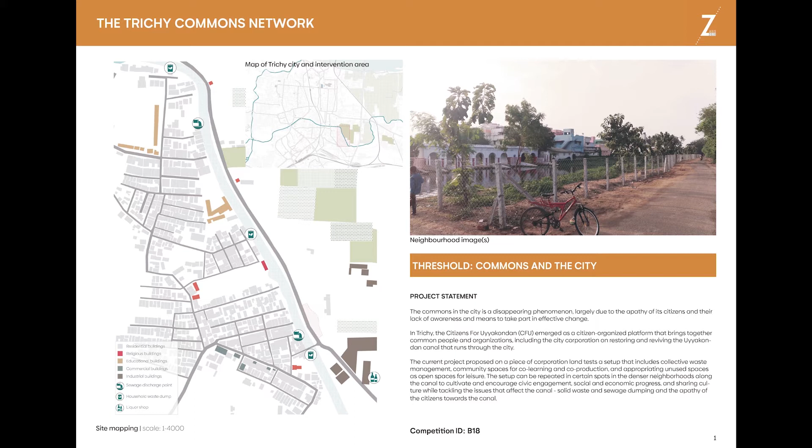Located next to the waste management complex is a community meeting hall with a diverse educational and cultural program, including a library with internet access. A third element is a public open space incorporating a child's playground and a youth area.

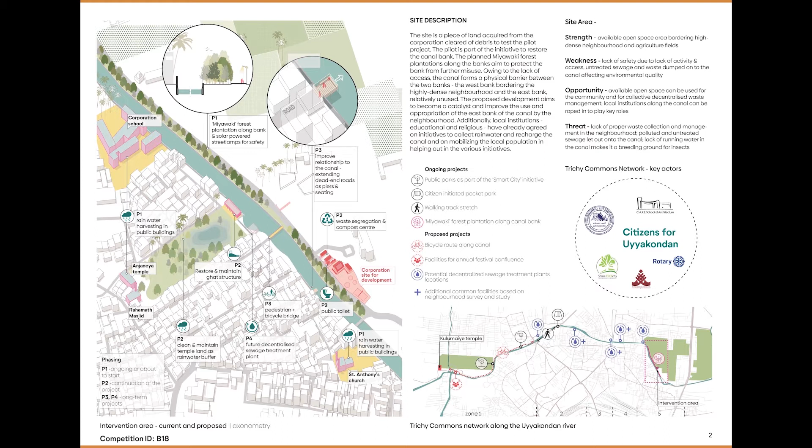Other fine-scaled urban elements include a pedestrian and cycling bridge linking both sides of the canal and a series of small platforms at the end of the neighborhood streets overlooking the canal for informal gatherings.

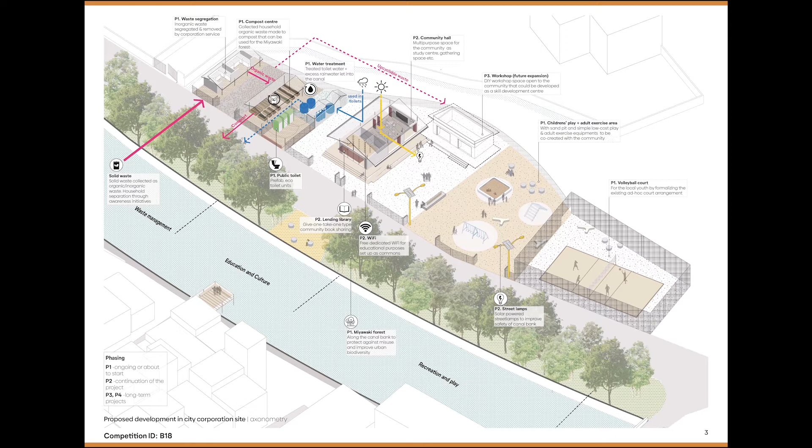During our jury deliberations, my colleagues and I had an active discussion about the meaning and symbolism of the light metal fencing indicated in the project's three-dimensional drawings. Securing the space was seen as necessary, but surely for this place to be a community resource for everyone, its borders needed to be broken down. We wondered if a more subtle solution could be thought of.

One way to think of this concern could be to rearrange the combination of elements. If the children's play space and volleyball court were reconfigured into a courtyard, a kind of outdoor room, they could be bounded by the waste management building and the meeting hall. A compound would then be created where the public space would be embraced by the buildings rather than merely being fenced.

I noticed in the comprehensive video and a photograph of the existing conditions on the first sheet of the submission, a religious building located on the neighborhood side of the canal bank. This archaic building has a monolithic resonance that I feel the present architectural language of the scheme could be inspired by in a contemporary way. This small but monumental simple structure has a civic presence that the wastewater plant and meeting hall deserve.

Notwithstanding, this project has an expansiveness about it that is both based in gritty realism and a forward-looking spirit. Its authors paid special attention to its context. It is a critique against the routine master planning attitude. Instead, it is based on an approach that works at the intersection of urbanism and environmental responsibility through citizen activism.

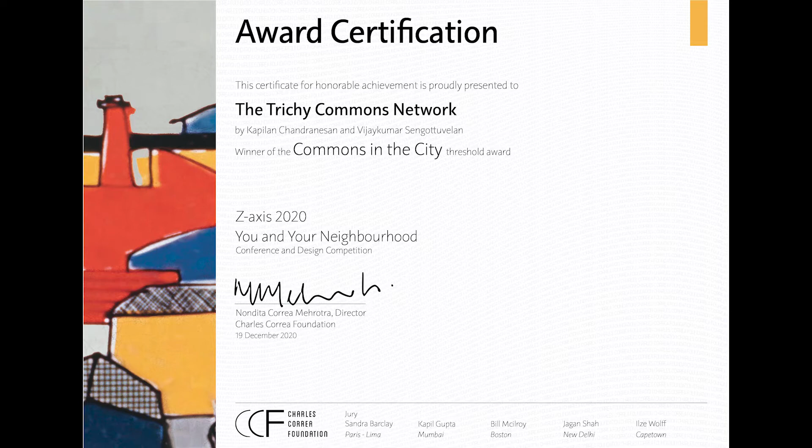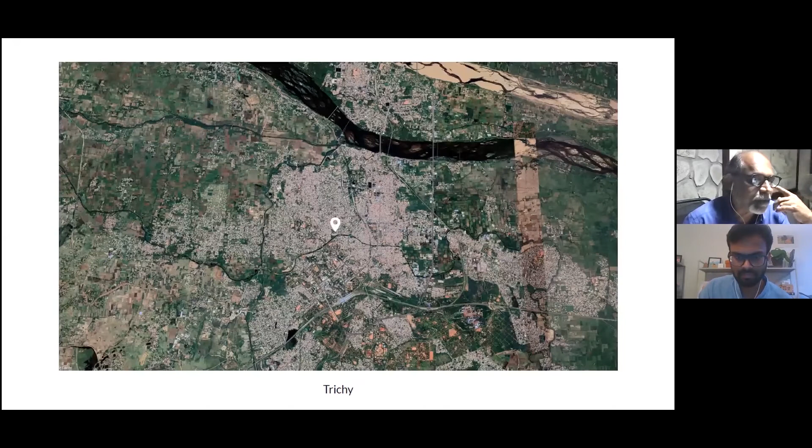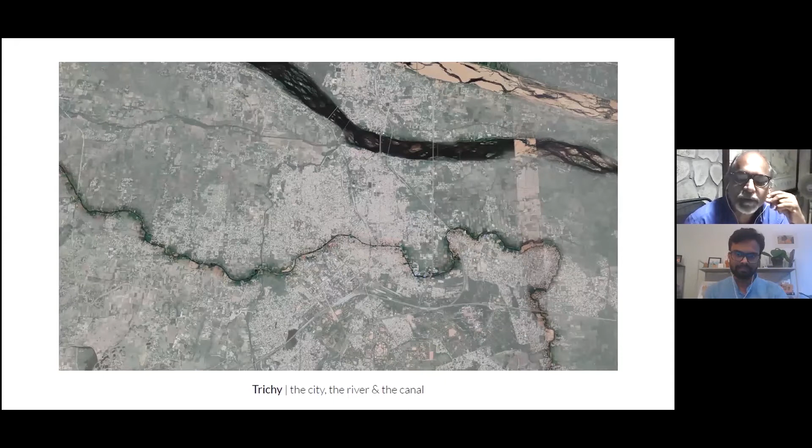So this project actually started as an urban design project in the C.A.R.E. School of Architecture under Professor Ramalingam, Godwin, and Ranjita. The students worked on this project, and then to take it further, we also had a few workshops, and one of the workshops was conducted by Professor PBK Rameshwar.

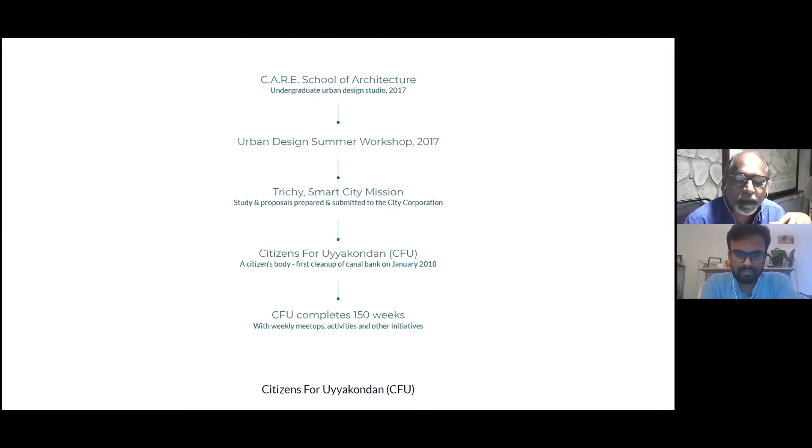And so then we thought that it should be taken forward, and we tried to form the Citizens Forum for this canal, which is a 1,000-year-old canal called the Uyyakondan Canal in Trichy. So we tried to form the Citizens Forum, which we called Citizens for Uyyakondan.

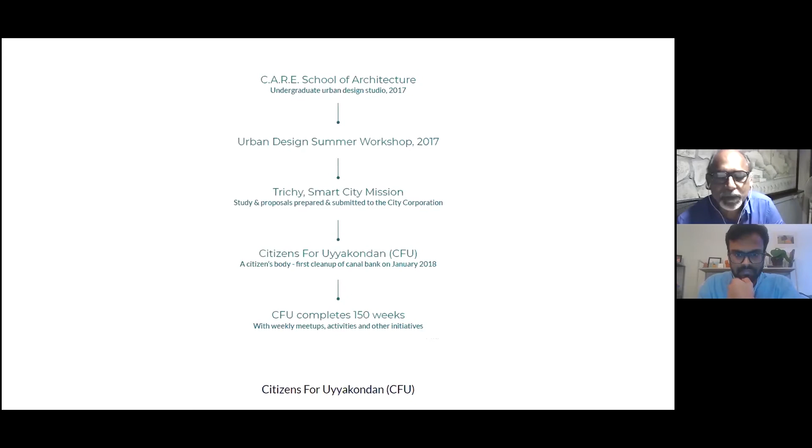Because it happens to be in the middle of the place, what we said was anybody can join, the criteria is that you should be using water. So it made people get excited, and we had lots of people. We had people from all walks of life coming in, professionals, students, and others also.

And then we tried to rope in the corporates and others also. So we had the C.A.R.E. School of Architecture and Bishop Heber College as the institutional partners. And then we had an executive arm, which is the Bridge Foundation. And we had the professional connect with the Indian Institute of Architects, Trichy Center. And then we worked with the Rotary Club of Trichy and the Inner Wheel Club. And we collaborated with the Trichy City Corporation and the PWD River Conservation Division also.

And as far as the corporates were concerned, we are in touch with HPCL, which has sponsored our work. And we are also in touch with ONGC. And so this is how it started. We started on January 7th, when Citizens for Uyyakondan launched the cleanup drive along the banks of the canal. And now we have completed about 150 weeks.

So we have tried to engage with the public throughout this, and post-COVID, or during this hopefully the last session of COVID, what we tried was to focus on one area which is at the fag end where the canal leaves the city. That is a very polluted area.

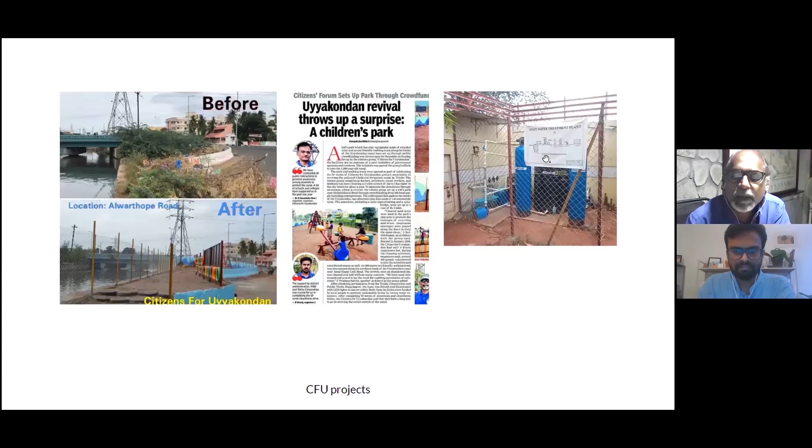So here we are working with the corporation, the people of that area, and our people from the Citizens for Uyyakondan. We are trying to get some activity there where we would like to involve the public. For this, one of the things was we tried to rope in a church, temple, and mosque situated at Durisamipuram, where we thought we will ask them to do rainwater harvesting and let the filtered water into the canal. So this is what we have been doing right now.

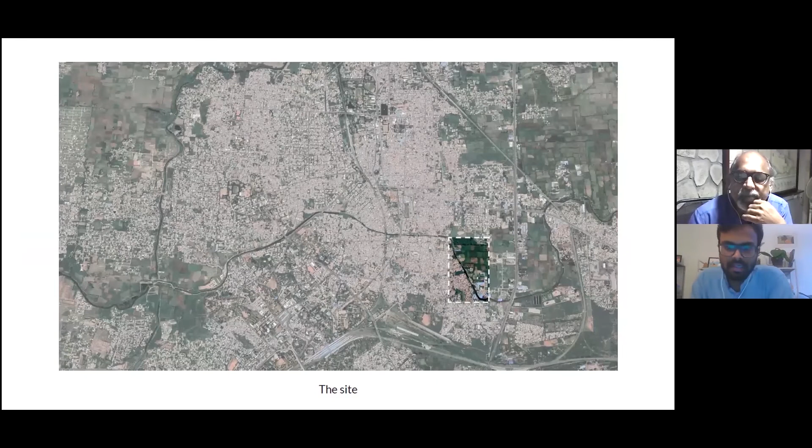So for this proposal, we take this part of the city, one of the places where the canal and the city limits join. As you can see, it's a very dense neighborhood in the city, and the canal forms a dividing line between the city and the agricultural land around it.

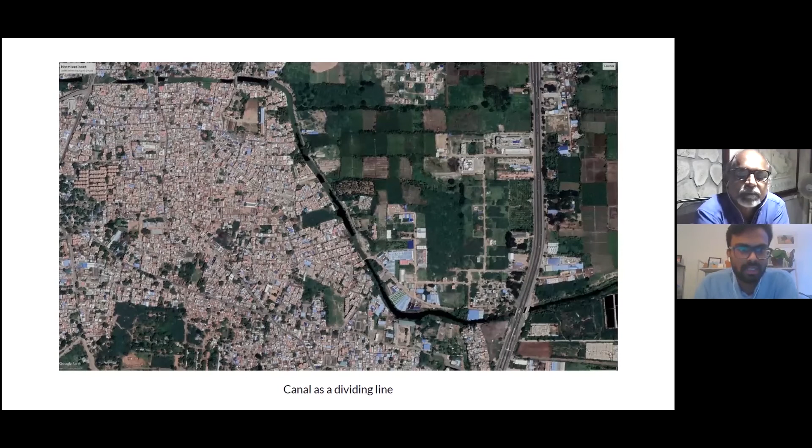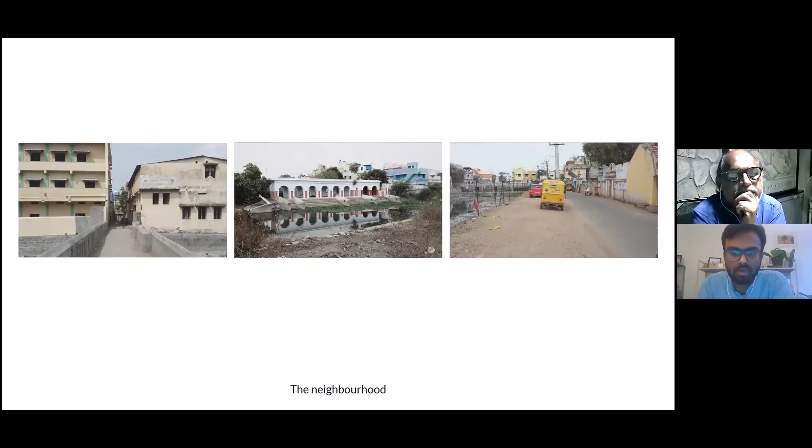It's also a relatively poor neighborhood with lack of good quality open space. So some images from the neighborhood, and the issues the neighborhood faces are similar to the issues the canal faces throughout the city, which is dumping of sewage and solid waste, poor maintenance of the bank, and lack of any quality open spaces. So the canal is viewed as a disadvantage.

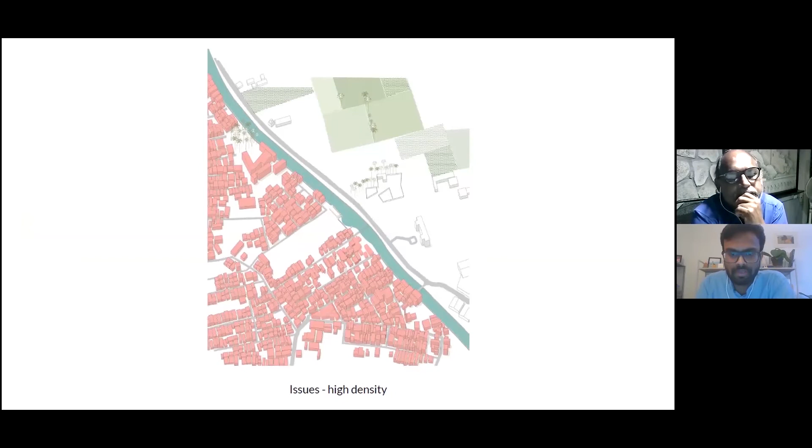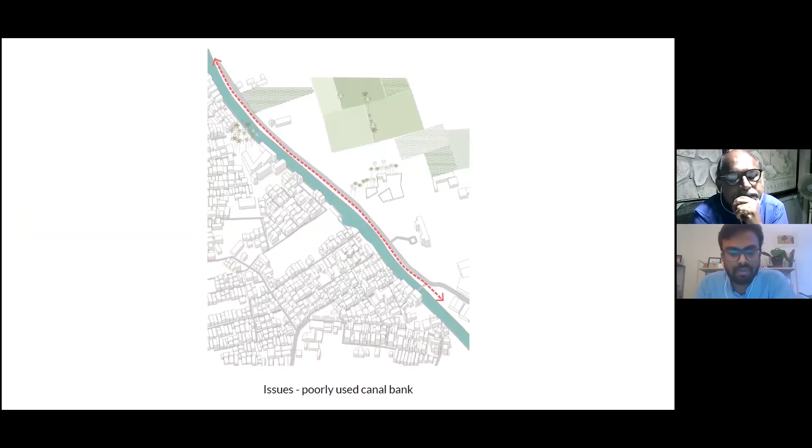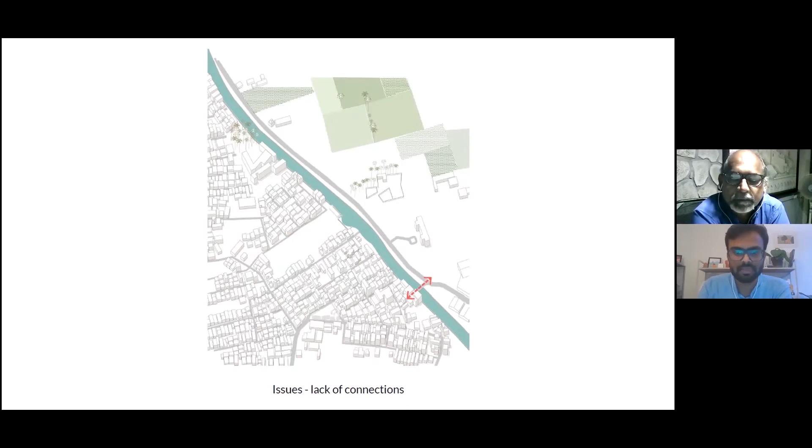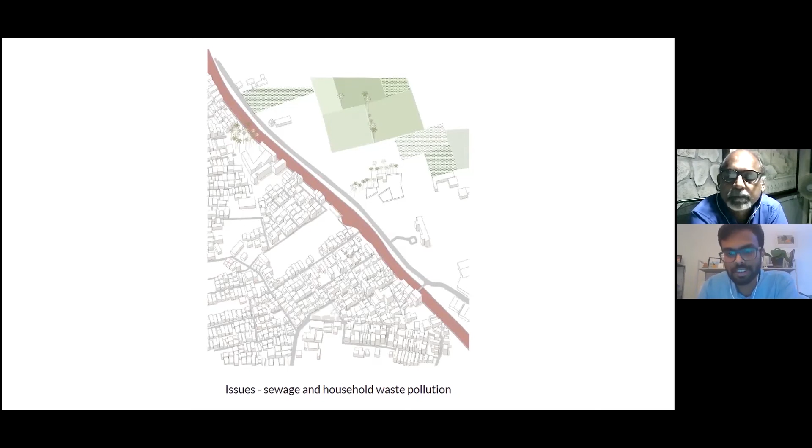This is an overview of the neighborhood. It's a dense neighborhood with no open spaces, also relatively poor households. The northeast bank of the canal is unused, and there is a lack of perception of safety there. It's unused also because of the lack of connections. For a stretch of 1.5 kilometers, there is one small pedestrian bridge, which effectively leads to neglecting the canal, which has now become a place for dumping sewage waste and household solid waste, without any relationship to the neighborhood.

So we looked at ways, one at the neighborhood level scale, and the other at a specific site level scale. At the neighborhood level scale, one of the first initiatives already underway is to clean up the northeast canal bank and establish a Miyawaki-style forest plantation to also protect the canal bank from future misuse.

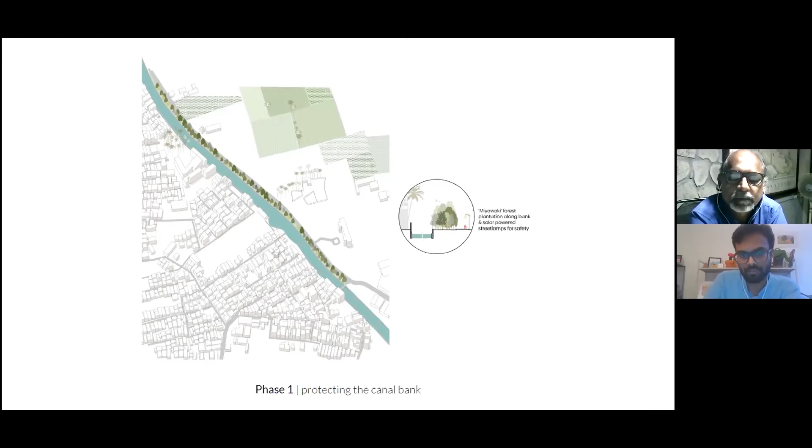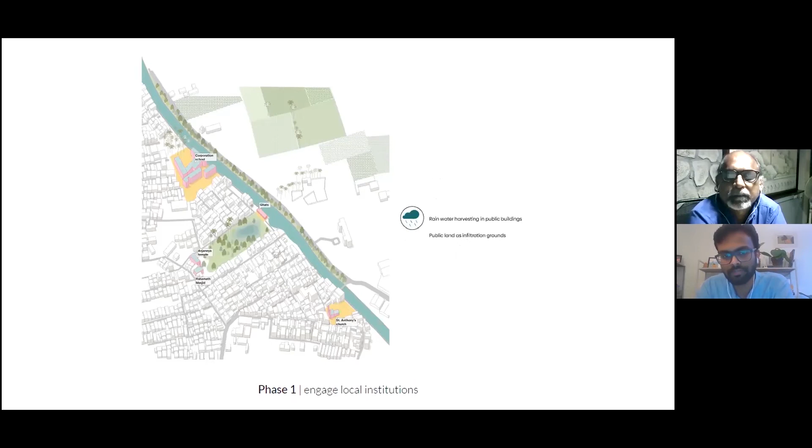The other, like it was mentioned, we rope in the local institutions - the church, the temple, the mosque, and the school - to engage with rainwater harvesting, but also engage them to raise awareness within the community. The third is CFU has agreed with the municipality to develop an unused plot as a community center with local waste management.

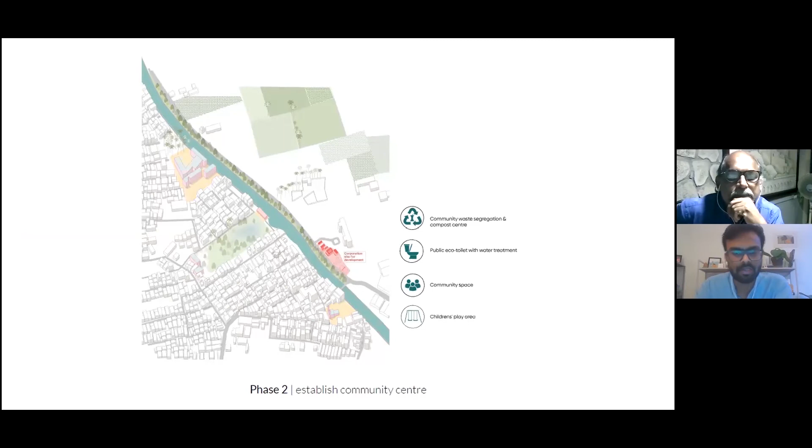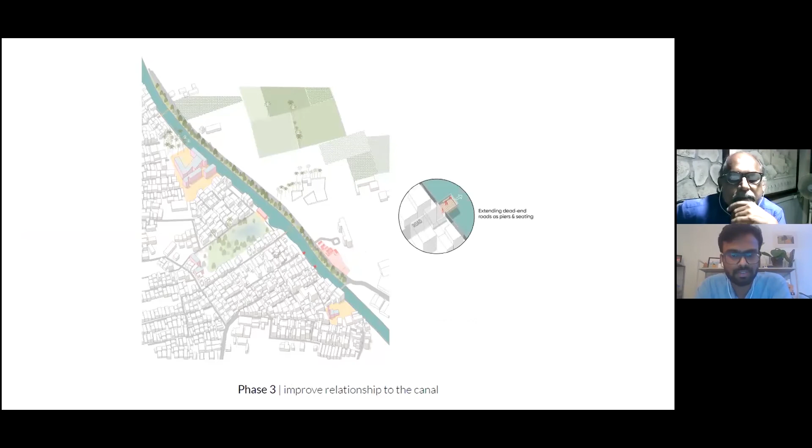And the fourth, longer term prospect, is to improve connection through pedestrian and bicycle bridges, extend dead-end roads into small platforms to increase the relationship of the people with the canal, and then to develop a decentralized sewage plant to treat the sewage water from the neighborhood.

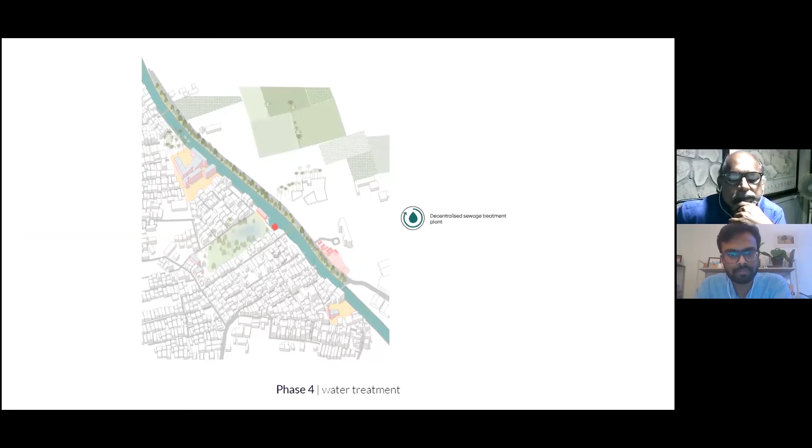At the community center, it's a bit more focused. This is the land acquired from the municipality to develop as a community center, which has been cleared of debris. We follow three main pillars: one is to have localized waste management and waste segregation, then to develop a community space, and the third is to develop an open leisure area for the neighborhood.

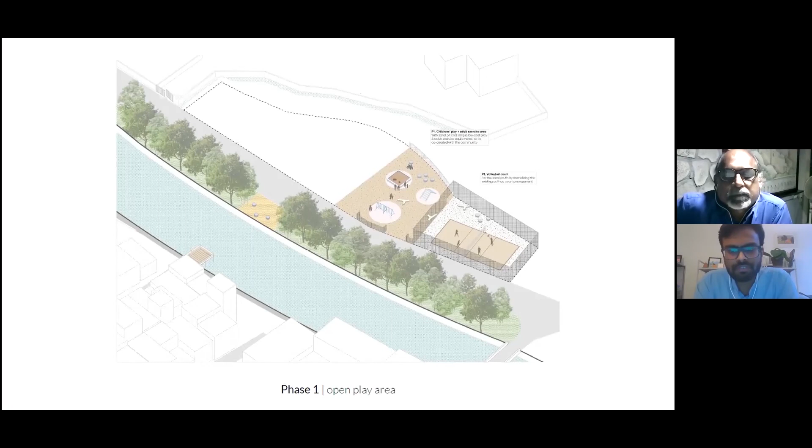The phasing of development is to establish the low-cost, easy initiatives first. Right now the local youth use this open space for an ad hoc volleyball court. We would formalize it to establish this place as more of a community space, and then to have a small low-cost public children's play area.

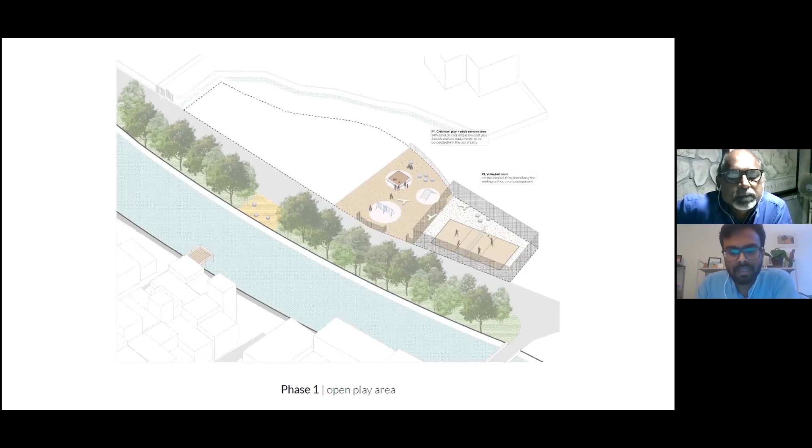The next step of development is to have a collective waste collection center and waste segregation, where the organic waste could be composted on site and used for the Miyawaki forest that's been developed. And then to have a few public eco-toilet units with a small water treatment plant to be let into the canal.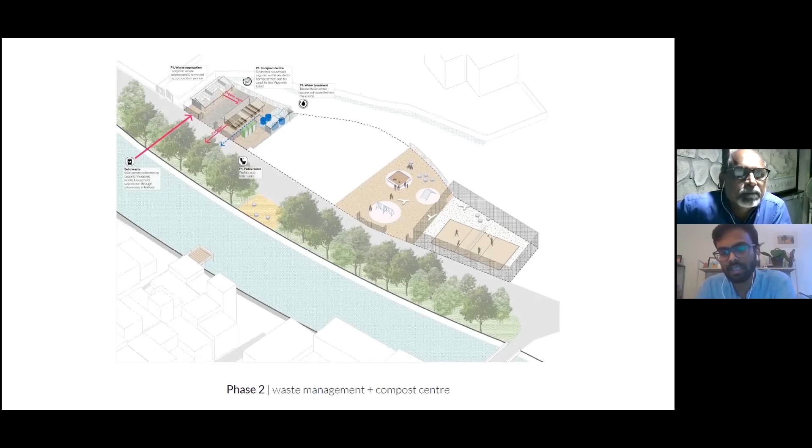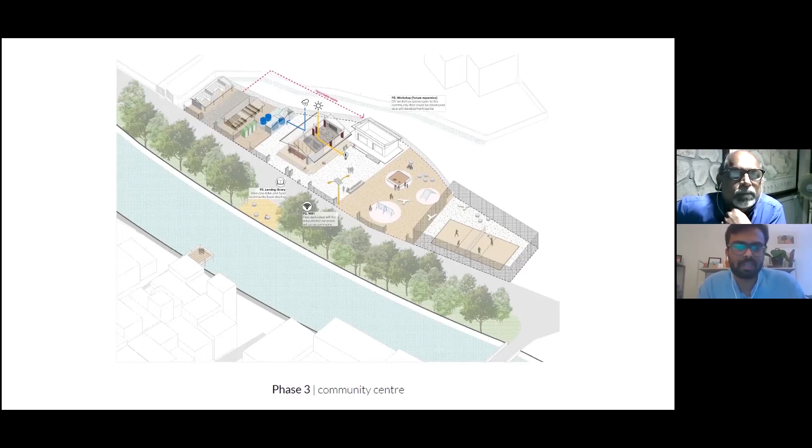And in the third leg of development is to establish a community space with a lending library that is also gaining popularity in different parts of the city. A small hall that could be used as a local tuition center for the kids or for other community activities, and then to establish a Wi-Fi network for educational purposes. And in the future, to develop a small workshop where people from the neighborhood could come and fabricate - more like a small production and education center.

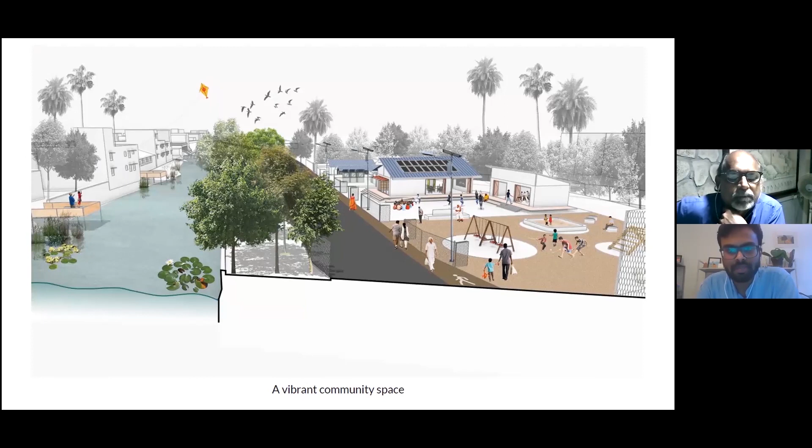I think the main goal for us with this is to actually develop or pilot a project wherein we could test if we could bring back a sense of ownership and community engagement in a neighborhood such as that, which goes hand in hand with the canal revitalization and also with neighborhood development.

And since the competition, like it was mentioned, we conducted a webinar on rainwater harvesting and canal water recharge. We obtained a pledge from the local religious institutions and also the educational institution to set up rainwater harvesting schemes and to recharge the collected rainwater into the canal.

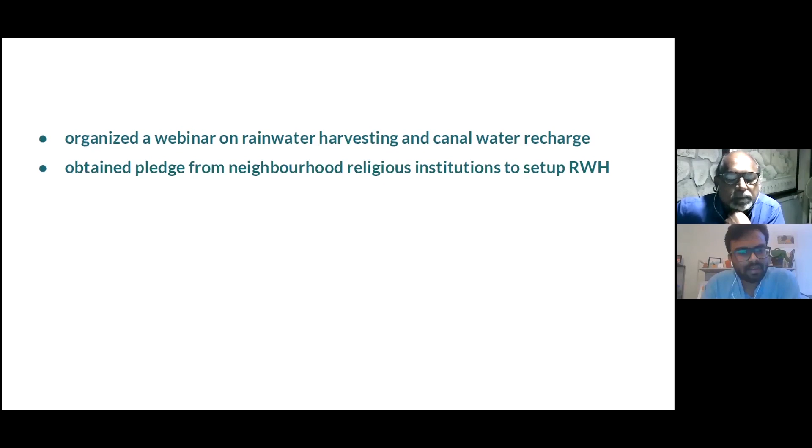We are preparing a questionnaire to understand the issues regarding waste collection and waste management in the neighborhood, their perception towards the canal, and their wishes and other facilities, which is being circulated in the coming weeks so that we could fine-tune the proposal.